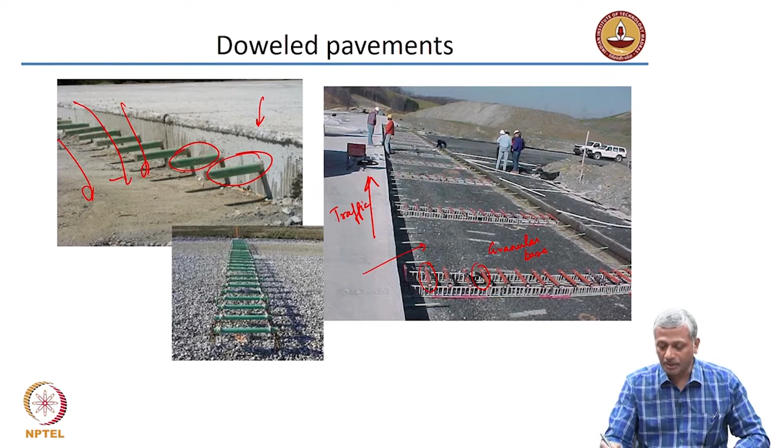So, this is the traffic direction, that is the traffic direction, and they have placed the dowels already before putting the concrete, right, and then they will be putting the concrete on top here, filling up the concrete on the top.

Now, dowels are provided to connect the slabs in the longitudinal direction. So, this is the longitudinal direction. You can also have dowels provided in the transverse direction. So, dowels are also provided to connect the slabs in the transverse direction. So, both ways there is good load transfer between one slab to the next. So, that is the use of a dowelled pavement.

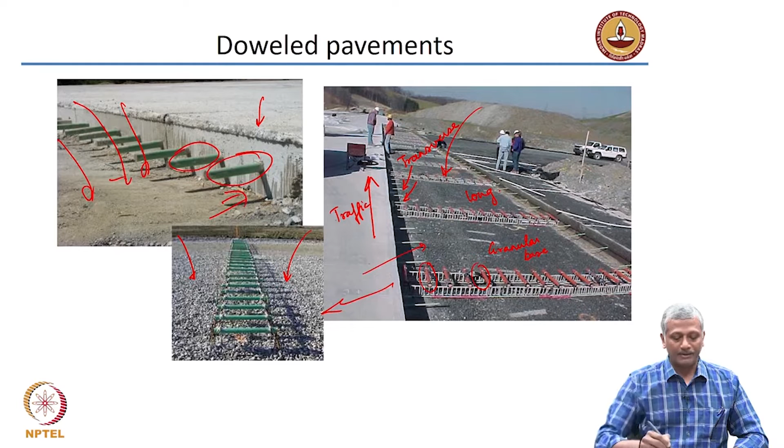Again, a close-up view is shown here. These dowels are placed exactly where the joint is supposed to come between adjacent slabs. So, then you will be pouring the concrete on one side and then pouring the concrete on the other side, just like what is shown in this case. Okay.

Of course, a continuously reinforced concrete pavement is nothing but a regular reinforced concrete slab which has reinforcement in both directions. So, that is what you see here in a close-up. The reinforcement is actually extending in both directions. So, here there are no joints. See the roadway surface, there are no joints in the concrete.

That is because the shrinkage and thermal effects are taken care of by the reinforcement directly. You do not need to provide joints and provide dowels across the joints. Okay. So, here the bottom picture you see, before the construction process you have the reinforcement mat which has been laid out, and then these are small,

not really cover blocks, they are called chairs, to ensure that you can increase the height at which the reinforcement is placed. You do not want to place it directly on the ground, because it should not be in surface contact with the ground, otherwise it will get corroded. It is usually placed directly in the center of the rigid concrete slab.

Okay. So, to place it in the center you need to raise it above the ground, and to raise that you need to provide these arrangements which are called chairs. They are called chairs, again made with steel, essentially to make the steel mat sit a few centimeters above the ground level.

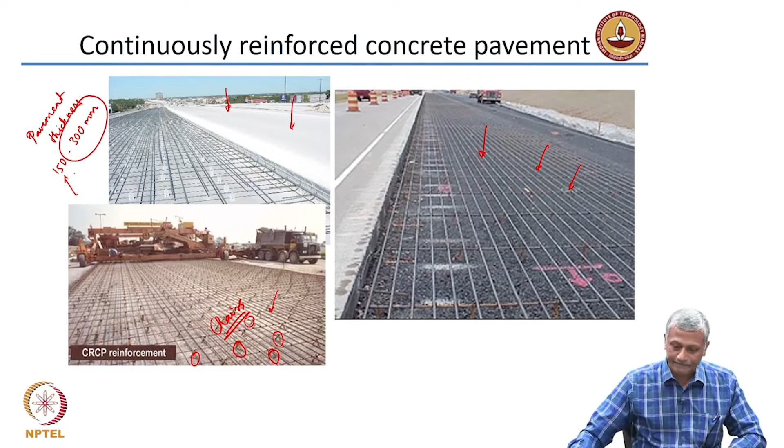Now, in some cases, after completion of the concrete placement and finishing, you have to provide texturing of the pavement surface. Remember we talked about this briefly in the concrete chapter also. After finishing, there is some texturing that is done. This is one example of the texturing called brooming.

So, this broom which has very rough bristles is rubbed on the top surface of the concrete. The concrete is not completely hard at that point of time, it has not achieved its final set. So, the surface can be altered by brooming, and this brooming ensures that you get a good grip on the road surface when the vehicle moves on it. You then have another aspect called tining.

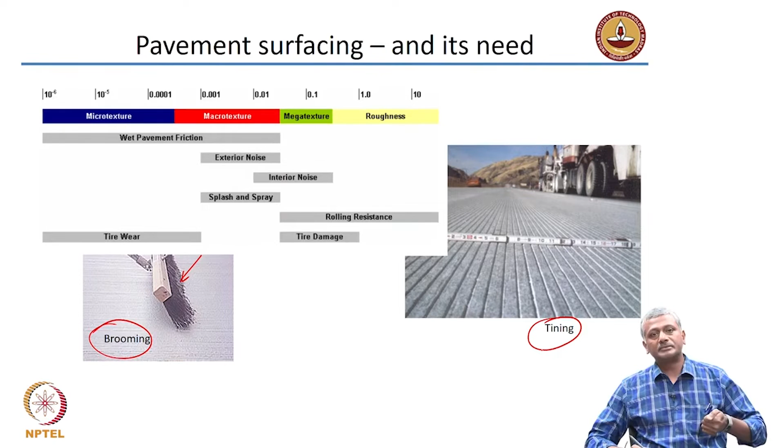Tining is, after the concrete surface has become somewhat hard, not very hard but somewhat hard, we take this grooving tool and cut a groove on top. This is not a cut rather, but it's just a small groove that is provided on top. So, if this is your pavement, I am just providing a very small groove at small distances.

This is not a crack, this is not a joint, but this is just a grooving done on the pavement surface. So, we are talking about a few millimeters, maybe less than 5 millimeters of groove actually created on the concrete surface. And you see that this is the direction of traffic and the tining is done along the direction of traffic.

What does this tining do? It helps in providing, first of all, good grip, especially in wet conditions. When the conditions are wet, the tining helps to increase the grip of the tire on the surface. So, it is a very good thing to do for concrete pavements.

So, depending upon what you need in terms of performance, you can have different types of pavement textures, and that is what is shown here on the top. For example, roughness is of the order of a few millimeters, 1 to 10 millimeters. Then you have what is called mega texture, which is about 0.1. And as you go smaller and smaller, you go to macro texture and micro texture.

So, what kind of performance are these textures affecting? The roughness obviously affects the rolling resistance. The micro texture is responsible for the wearing off of the tire slowly. Wet pavement friction is taken care of by micro and macro texture. So, you need to ensure that the size of the tining grooves that you give are of this order, to provide the right level of holding on the pavement surface.

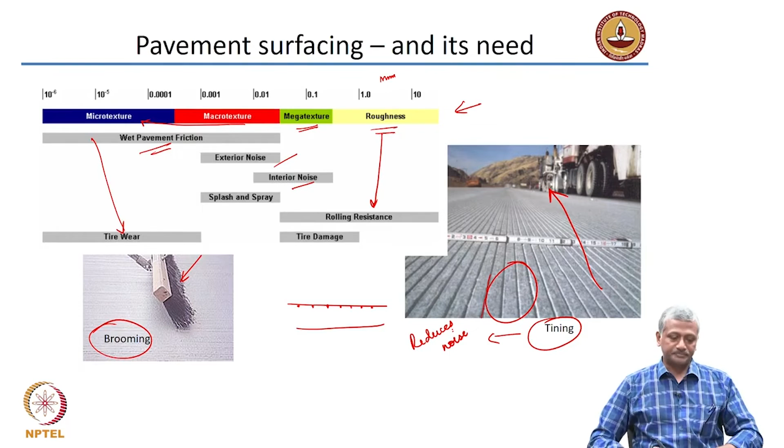Now, just like asphalt pavements, where we had some specific properties that we desired, in concrete pavements what do we need? Obviously, we need strength, mostly tensile strength. We also need abrasion resistance, because as vehicles move continuously on the surface, concrete will continuously get abraded. Fatigue resistance is also needed, because in buildings we do not really consider fatigue, but here we have to.

Cracking resistance is very important. Cracks, as I said, may happen because of shrinkage of concrete, curling or warping, both of which are related to heat and moisture. Skid resistance is important on a concrete surface, and of course the riding comfort. Because these joints are present, the riding comfort on a concrete pavement is sometimes not as good as on a flexible asphalt pavement.

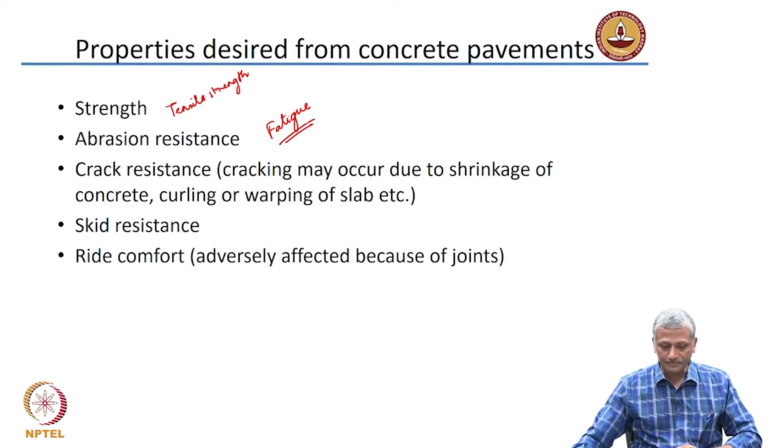So, very often in countries abroad, even though the main structural pavement is a concrete rigid pavement, they put a surface layer of asphalt concrete on top of the concrete pavement. That is an interesting example of a composite sort of pavement deck. So, these are the properties that you want from typical concrete pavements.

Now, to give you a bird's eye view of why one should consider one pavement over the other, the main considerations are the initial cost and the ease of construction. I already talked about this briefly earlier. The initial cost and ease of construction both point towards a benefit for flexible pavement made with asphalt concrete. Cost is low, and it is very easy to construct as opposed to cement concrete pavement.

Now, the maintenance cost and service life, how long is the pavement going to serve satisfactorily? In that case, the concrete pavement is the winner. So, here you have asphalt concrete, here you have cement concrete. Because it is easy to maintain over a long period of time, if you have done a good job of the construction, the maintenance cost of a cement concrete pavement is not much at all.

On the other hand, asphalt concrete, because of the polymeric nature of the asphalt and its capability for getting degraded because of multiple effects, you can have a lot of issues with maintenance.

Okay. Ease of repair. Now, in ease of repair, again your asphalt concrete scores. We talked about surface recycling, we talked about surfacing itself. In some cases, you may have seen that in your neighborhoods, whenever a road pavement gets damaged and a VIP is visiting, you immediately have in the night some sort of a contractor who comes there and just puts a new surface of asphalt pavement on top. Just a thin asphalt pavement layer is put on the surface of the road. They have not repaired any damage. All they have done is resurface the road.

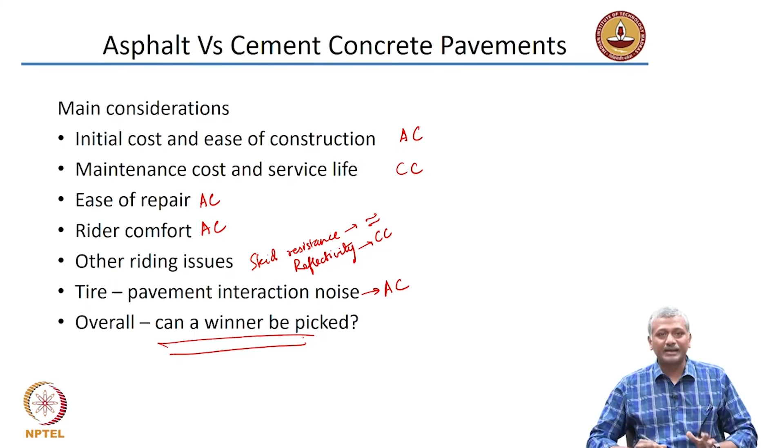The other aspect when you are talking about pavements in a city is that oftentimes we have our water lines and electricity lines under the pavement. When you have an asphalt concrete pavement, it makes it all that much easier to access the pipes underneath and then resurface the road. Cement concrete, again, a lot of effort is involved in actually breaking open the concrete. So, there are a lot of things that you need to consider in order to be able to properly choose between cement concrete and asphalt concrete pavement.

Okay. So, I will not give my own opinion here, but I will leave the choice to all of you to really think about it from different perspectives, from a user's perspective, from the operation and maintenance perspective, from the owner's perspective, like the National Highway Authority of India, NHAI, from their perspective, what do you think should be the ideal way to construct a pavement? Is it asphalt concrete or is it cement concrete?

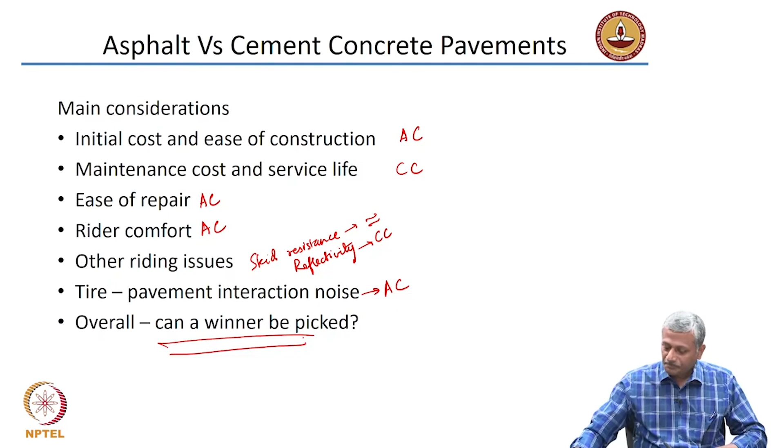Okay. So, with that, we will complete this chapter, and also this is the last chapter in this course. I hope this course has been very useful for you and it will build up your foundation for higher level courses in civil engineering. I am also providing some references here. There are a lot of references on asphalt concrete that you find in conventional construction materials books also, but of course, understanding asphalt is critical from the point of view of appreciating the way that asphalt concrete pavements behave. So, I would really urge you, in case you are interested in asphalt, to take up higher level courses in transportation materials to really satisfy that desire to learn about asphalt.